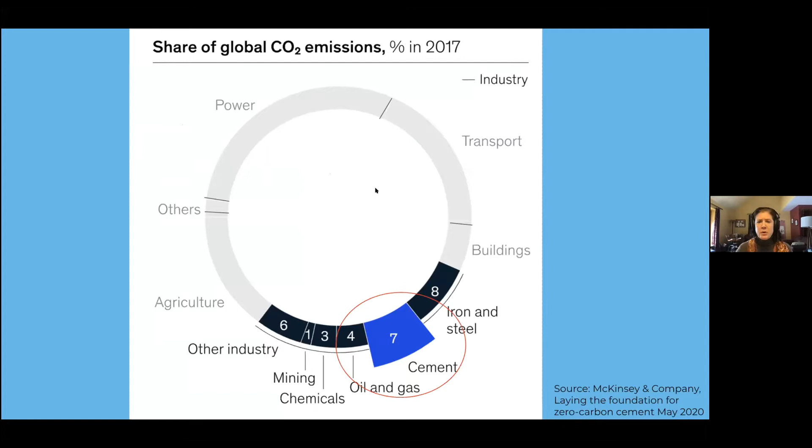So I mentioned both concrete and cement - I want to make sure you understand the difference. Cement is the glue in the concrete. Cement is mixed with water and aggregate, which is made up of sand and gravel. It turns out that most of concrete's emissions are due to the Portland cement, the glue.

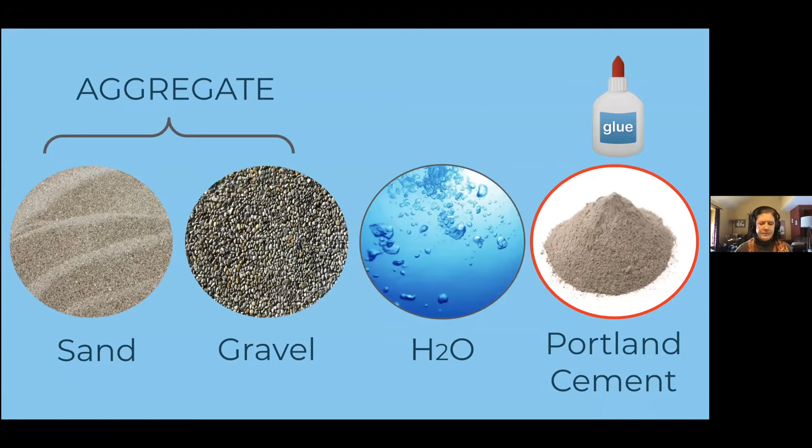Now this chart shows on the bottom line the greenhouse gas emissions from different steps in the cement manufacturing process. You'll notice there's a higher number for the calcination process than for the fossil fuels. That's an important point because most emissions happen from cement in the chemistry of heating the limestone. The heated limestone releases CO2, which becomes clinker. This releases more emissions than are released from the fossil fuels burned to make the heat. So reducing or eliminating the fossil fuels does not solve the cement emissions problem.

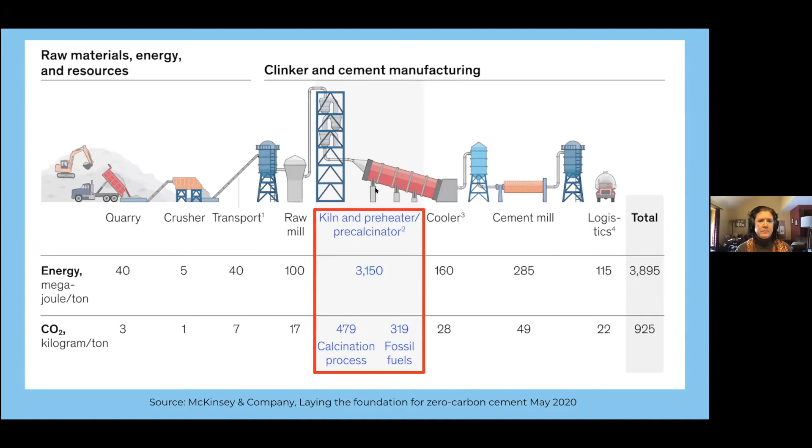The International Energy Agency and others have identified carbon capture and reducing the amount of clinker in cement as the most impactful ways to reduce emissions.

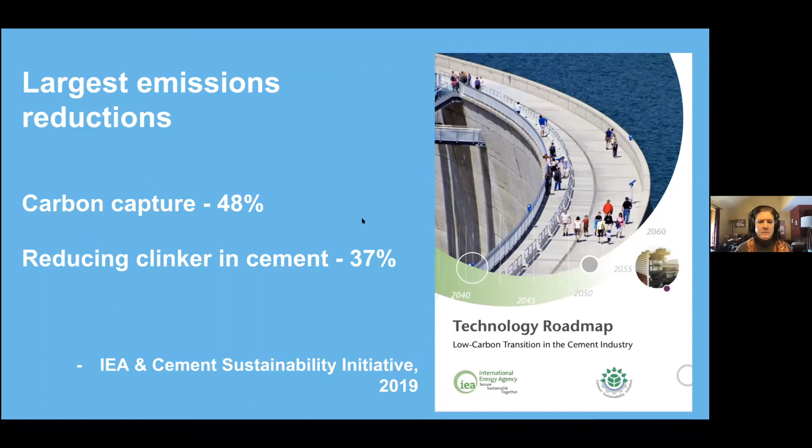So the 2 main approaches we're looking at to achieve low carbon concrete are to use less Portland cement, and to capture CO2 and turn it into a solid in the concrete. It is even possible to put so much CO2 in that the concrete becomes carbon negative.

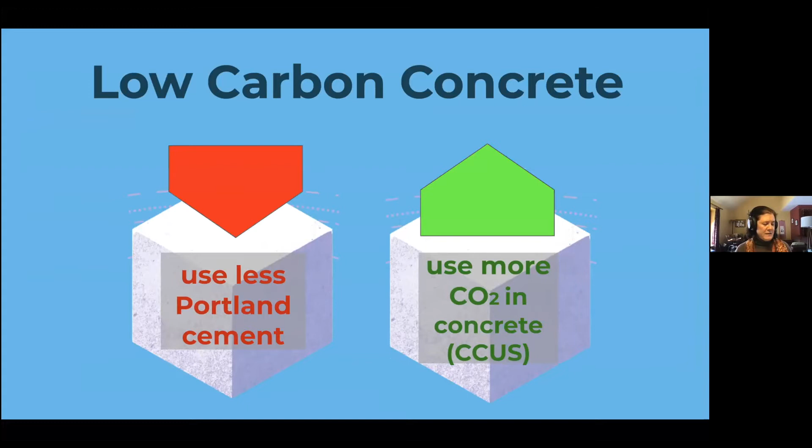A great local example of low carbon concrete comes from Port Authority. They've been requiring that all of their concrete have at least 30% substitute materials replacing the cement. In general, contractors can provide this for no additional cost. A new substitute option they are excited about is ground glass pozzolan, made from glass that would otherwise go into a landfill. Port Authority is also working with academics on a low carbon concrete strategy, and they're going to be requiring environmental product declarations for concrete - let me show you what that is.

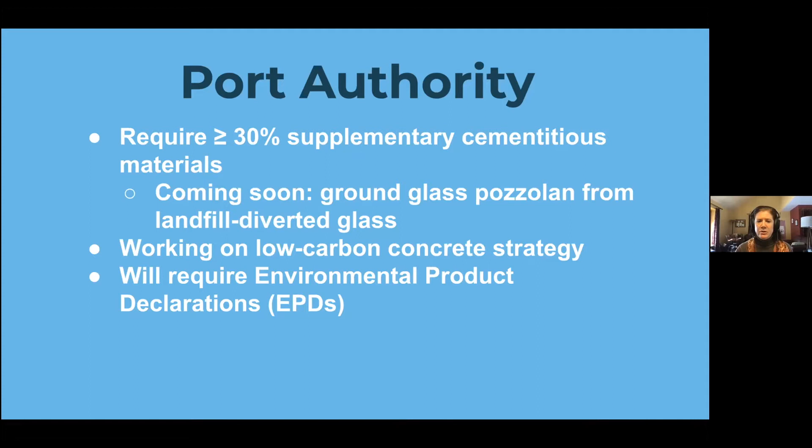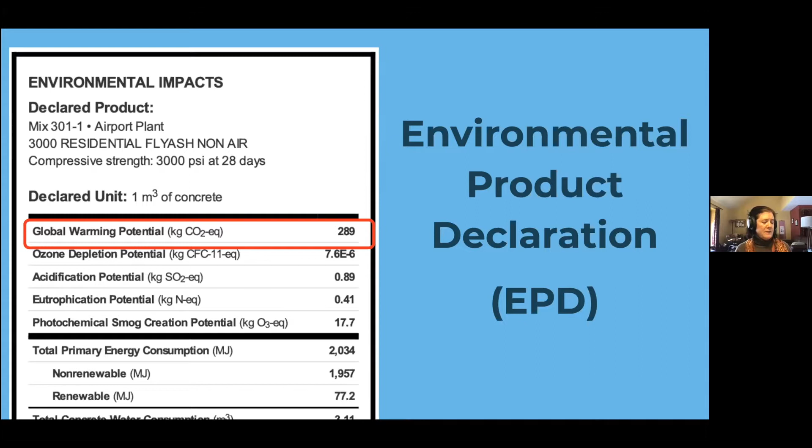Here's an example: an environmental product declaration, or EPD, is like a nutrition label that shows the environmental impacts of a product, including the global warming potential, shown here in the red box, which quantifies greenhouse gas emissions for a cubic meter of concrete. So LECCLA, our bill, requires the use of EPDs - we're going to see this again later.

All right, so let's talk about the bill.

As Ed mentioned, LECCLA focuses on state procurement. The state is a major purchaser of concrete, making it a prime candidate for being an early adopter and driving demand for low carbon concrete.

There are several policy precedents for New Jersey LECCLA. There's California's Buy Clean program, which sets climate-based purchasing requirements for construction materials, though it does not address concrete yet. The United States Conference of Mayors in 2019 passed a resolution urging all cities to consider using CO2 mineralized concrete, meaning the CO2 gets turned into a solid in the concrete.

The city of Portland, Oregon has a low carbon concrete procurement program. And I've already mentioned the New York LECCLA bill, which is still pending. It turns out that the Netherlands has a very similar policy to LECCLA that's been in place for 8 years already, and has been used for the procurement of over $1 billion worth of low carbon concrete.

There are 3 components to New Jersey LECCLA. One is a bidding advantage for low global warming potential, or low emissions. The second is a bidding advantage for doing carbon capture, utilization, and storage. The third is a small tax incentive for concrete plants to create environmental product declarations.

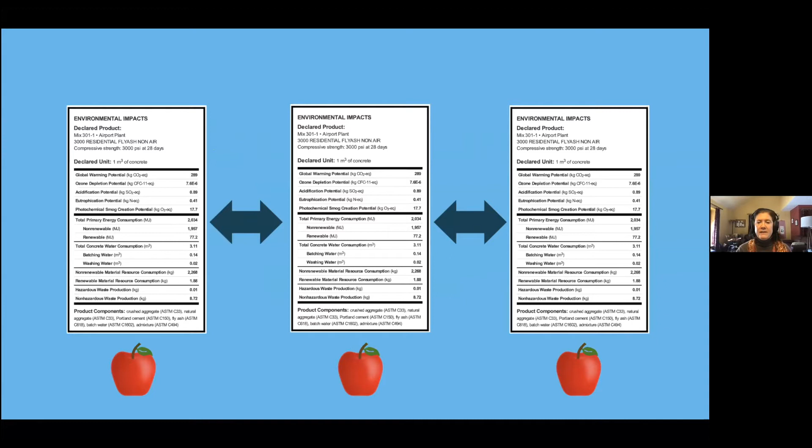So here's where the climate competition comes in. Bids with low GWP scores can receive a discount in the bidding process. Details of the bidding discount process are determined by the DEP commissioner and the state treasurer. Those details are not in the bill, so it allows for flexibility. But let's walk through a hypothetical example.

LECCLA provides a maximum discount of 5% for global warming potential. Say we have a project that gets 4 bids with GWPs. The bid with the lowest GWP, the lowest emissions, could get the maximum 5% discount. So if they bid the job for $100, the bid would be treated like it was for $95.

Bids with higher GWPs, or more emissions, would get a smaller discount. This could be on a sliding scale. There's no requirement to submit an EPD. If a contractor doesn't submit one with their bid, that bid just doesn't get a discount and it's competing on price by itself. There could also be a GWP threshold to ensure that bids with high emissions don't get a discount. So in this example, a threshold of 400 would mean that bid 4 wouldn't get a discount, but it would still be considered.

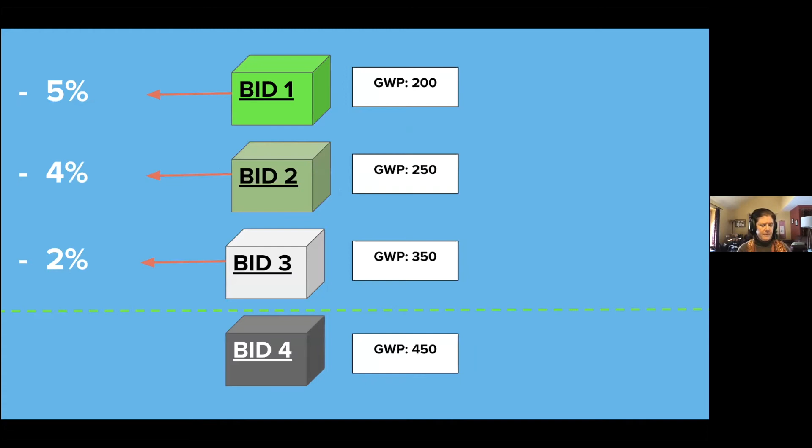Let's go back to our previous example. LECCLA sets a maximum 3% discount for CCUS. So in this case, if bid 1 uses CCUS, its total discount could be increased from 5 to 8%. That is the maximum total discount.

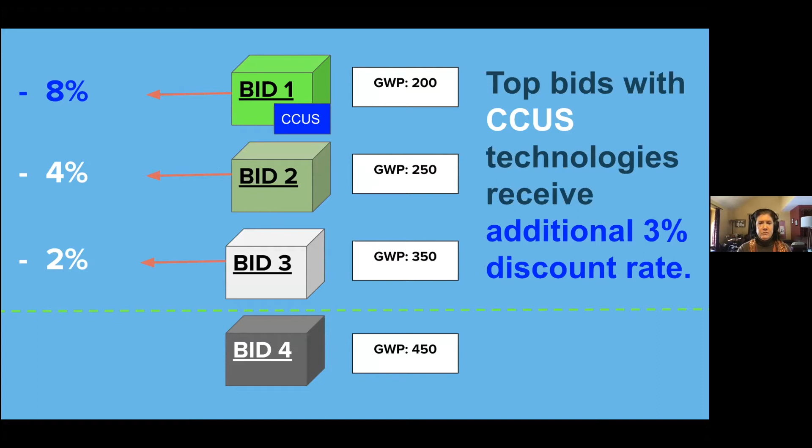So what is the price impact of these discounts? Does this mean that costs will go up by 8%? The beauty of this approach is that bids are still in price competition with each other, and the discount does not change that. The bidders don't know each other's bids or GWP scores, so they're still incentivized to submit a low bid. Climate competition rewards bids that give the most climate benefit for the lowest cost.

And then the final component of the bill is a tax credit to help concrete producers pay for the creation of EPDs for their concrete mixes. The credit is for a maximum of $3,000 per concrete plant. There are only 55 New Jersey plants approved by the Department of Transportation, so if they all got the credit, that would be a cost of $165,000. Concrete producers would only be eligible for the tax credit for 2 years.

So just in summary, LECCLA's approach has a number of advantages. It is technology agnostic—it's not picking a specific method for reducing emissions. It's performance-based. It allows concrete producers to combine multiple solutions in the same concrete mix, so it's to stack solutions. For example, they could substitute for Portland cement and also do CCUS. It rewards innovation by having a flexible discount mechanism that can adjust as new technologies come to market. It has no mandate and does not even require that concrete producers provide EPDs. And it maintains the cost benefits of competitive bidding.

So just to talk about concrete a little bit and orient us to what concrete is: concrete is a lot like a cookie. In a chocolate chip cookie, you've got eggs, flour, and butter—this is kind of your glue or binder system. You've got sugar and chocolate chips, that's filler and flavor. And then you have modifiers to make sure everything is light and fluffy and you get the right balance of everything. Concrete is very similar.

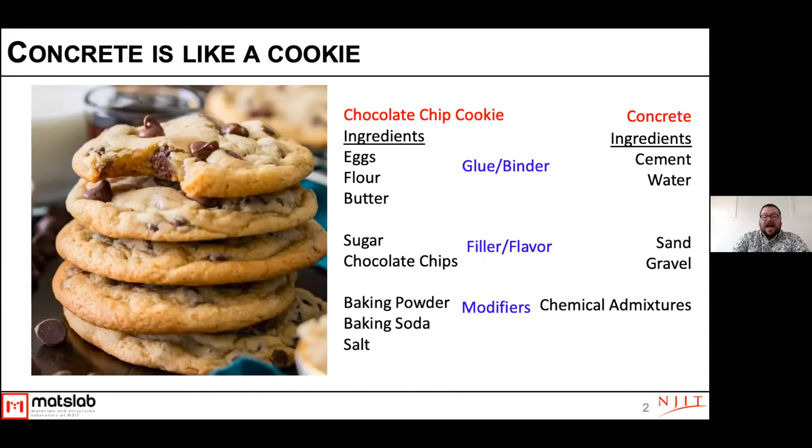We have cement and water, that is our glue and our binder. We have sand and gravel, which is our filler—it's really important for us to have that in there. If we made the whole system out of cement, it would be very expensive and very unsustainable. And then we have a whole bunch of other chemicals we can add in to try to improve that. But like a chocolate chip cookie, you have your basic version that is just cement, sand, gravel, and water. We have all of these variations available to help us change up the mix and give us the properties we want, including helping improve the sustainability and reduce the carbon footprint.

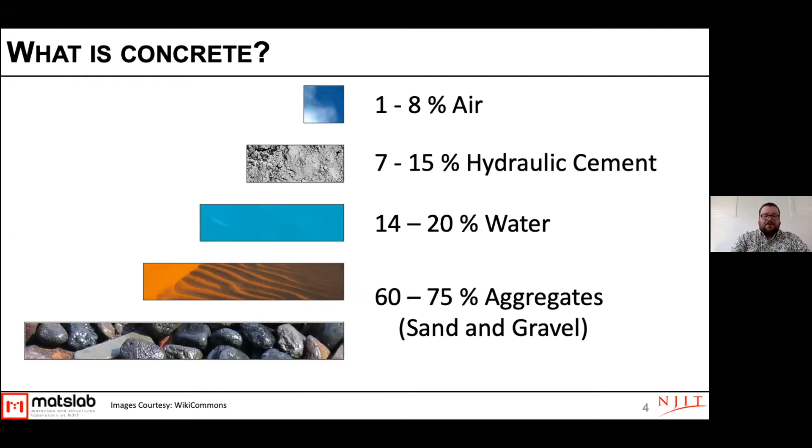So what is concrete? It's about 1 to 8% air, 7 to 15% hydraulic cement, which is your Portland cement in most cases—this is going to be where the majority of your carbon is coming from. You've got water, and then, like I said, most of the material in concrete is aggregates, so sand and gravel. So there's lots of alternatives here that will help get us to this green concrete mixture.

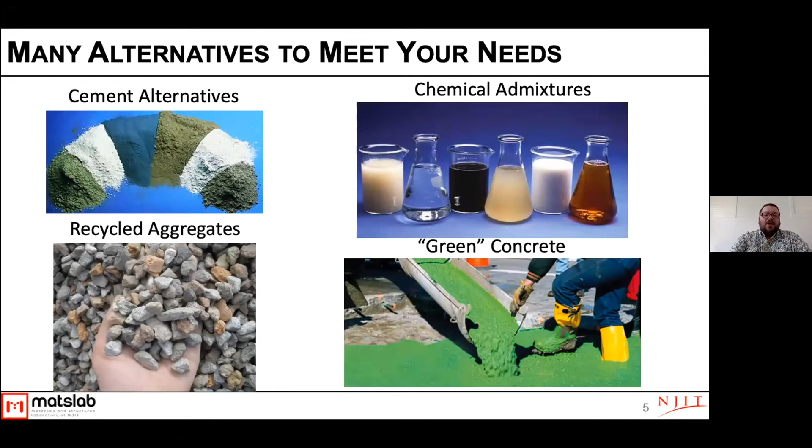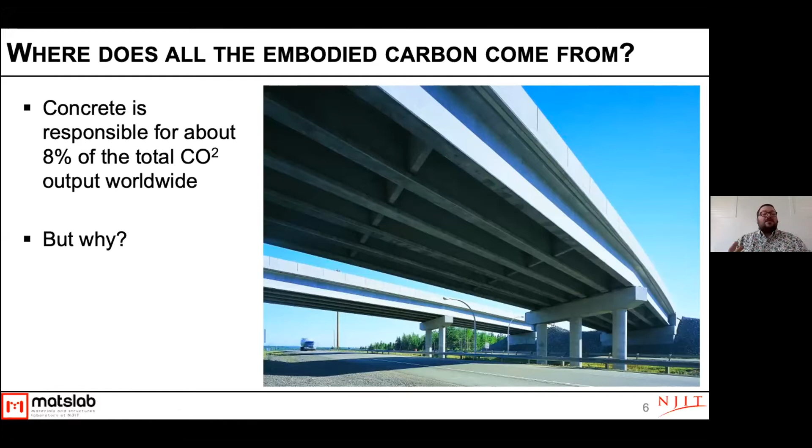But why do we need to do that, right? So concrete—as Sue said, cement is responsible for about 7% of the total CO2 output. If you look at concrete overall, we're adding another percent or two on top of that. And where does this all come from? Well, the biggest issue is that concrete is produced at such a massive scale—we produce almost 2 cubic yards per person per year in the entire world.

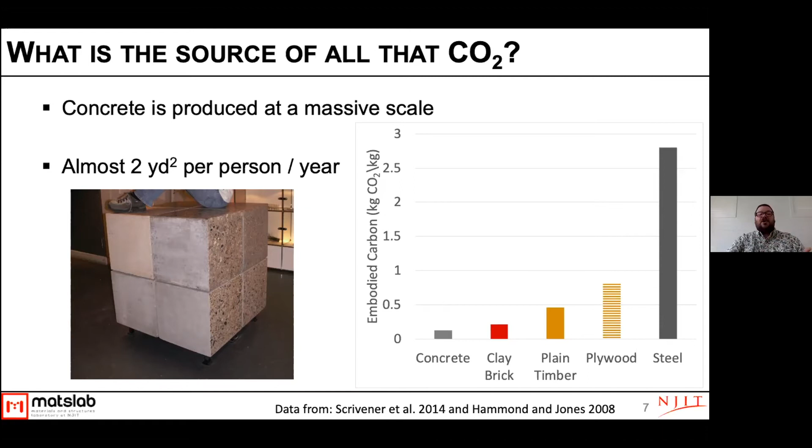And so that is, you can start to imagine how much concrete we're making every year. On a per unit volume basis, concrete is one of the more low carbon emitting materials out there. If you compare concrete to steel on a per unit volume basis, it's much lower. But of course, we make so much more concrete than we do steel that its impact worldwide is much more prevalent.

So that is a problem that we need to address to make sure that we can control that carbon. And where does it all come from? Well, most of it's coming from the cement. You get some CO2 production from quarrying out the raw materials, grinding it down, preparing it, turning it into a powder. That's really only about 10%.

Around 40% comes from what we call the thermal emissions. So this is what is being output from the heating up of the material. We have to heat it up to about 1400 degrees Celsius to get the chemical changes that we need. But over 50% comes from what we call process emissions.

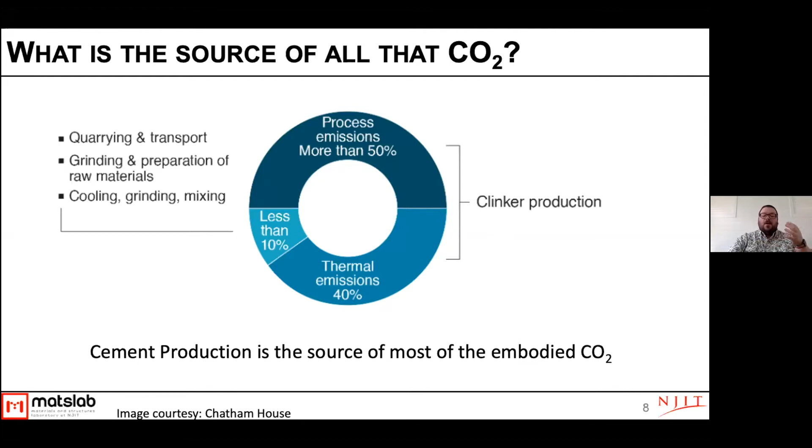And so this is what Sue talked about a moment ago, where we actually have to break down limestone. So when we make cement, it goes into a rotating kiln. This is usually around 300 or 400 feet long. It's quite a large facility. We don't have any cement production here in New Jersey, but there's some in New York and Pennsylvania.

And we put our raw materials in at the top. We have a heat flame coming down at the bottom, and those materials, as they move through the kiln, heat up and change. And so we use all sorts of fuel sources to try to heat that up. We have some that are more CO2 intensive than others. There's been a lot of work to try to shift the balance of that to make it as environmentally friendly as possible. There's been a lot of work in the efficiency of the kiln, making sure that the

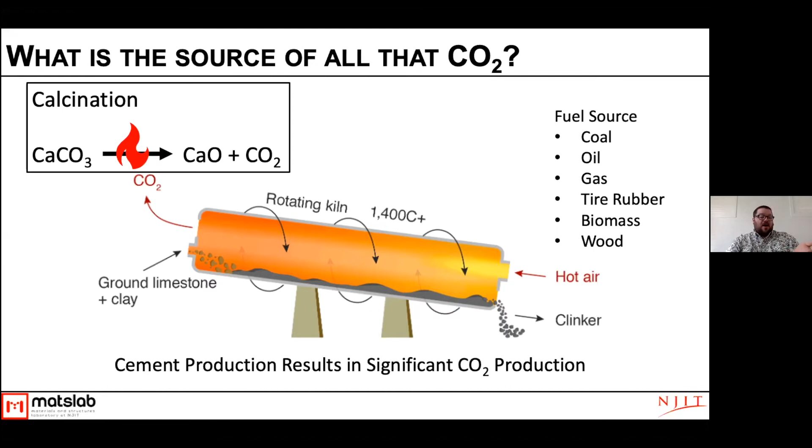heat is contained, that we use any heat that's bled off to do other things. But that only gets us so far, because we have this process called calcination. The limestone that we have to use as a raw material, we need to break down to get calcium oxide. And that is one of the most important components in cement.

And so when we break down that calcium carbonate or the limestone, the CaCO3, we heat it up and we release CO2. And that CO2 mostly gets lost to the atmosphere at the moment. There's a lot of new technology that's being developed to try to capture that as well. That hopefully will be coming on in the coming years. But for right now, that's a lot of CO2 that gets produced from this system.

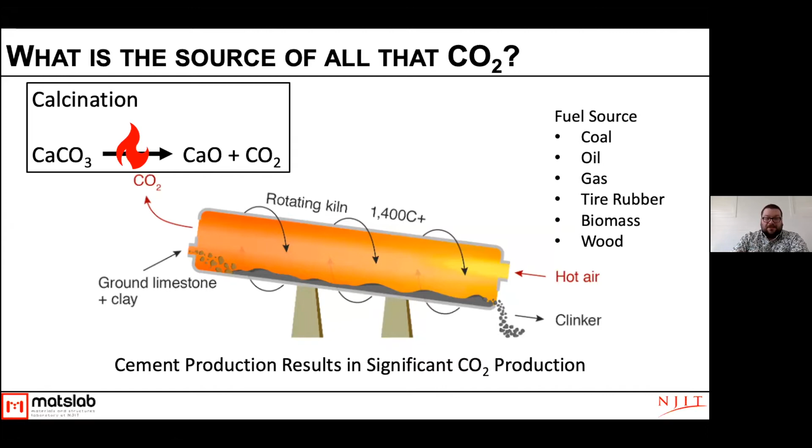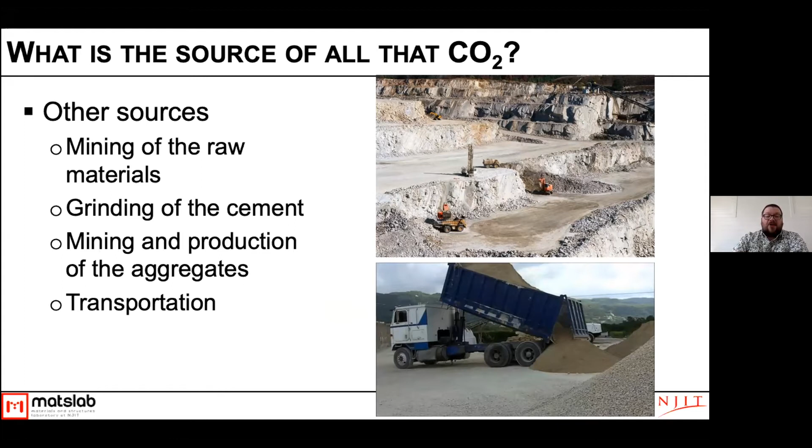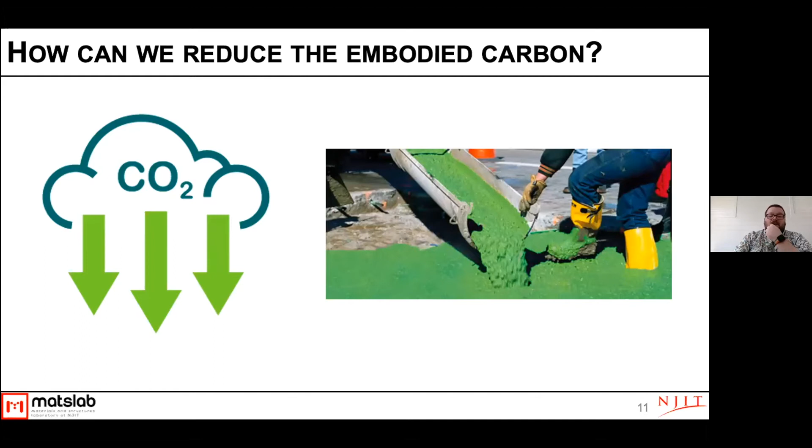Other sources outside of that, of course, is the mining, but really these are mining and transportation, but these are minor compared to what is coming out of the kiln just from the chemical process. So how can we reduce that embodied carbon and make our nice green concrete? We actually have quite a lot of options here. The first one that we typically talk about is reducing the Portland cement.

It's really difficult for us to replace it entirely. We have some alternative cements that work well, but for the most part, other types of cement need to be produced from materials that are not abundant in the earth, right? Portland cement comes from, we use limestone and clay. That's really all you need to make Portland cement. You can get that everywhere.

Other materials, like we can make great cements out of phosphates, but we need all the phosphates that we make to use as fertilizer. And there's no way that the phosphate supply, even if we weren't using it as fertilizer, could supplement what we need for cement. So our first task is to try to reduce this amount.

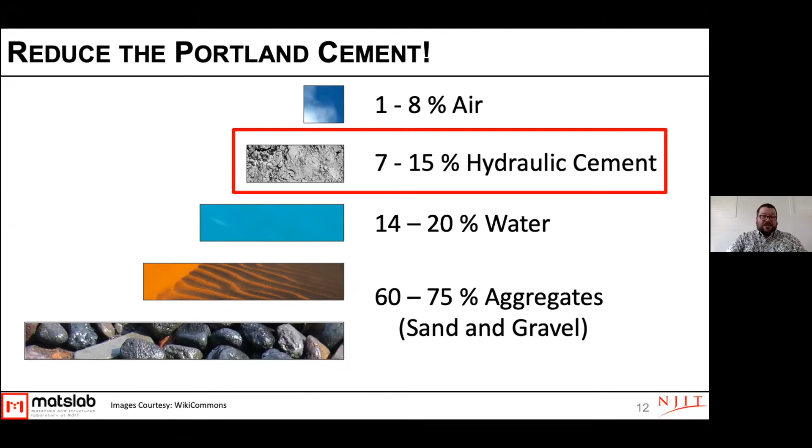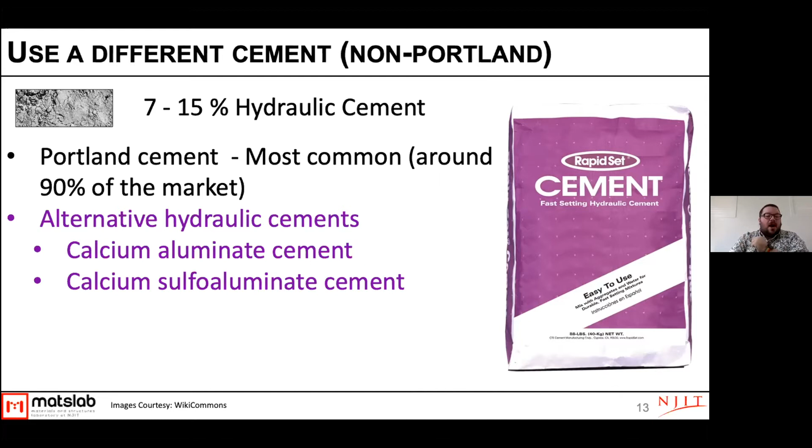So Portland cement is what we mostly use. This is around 90% of the market. We also have some of these alternative cements, like calcium aluminate cement or calcium sulfoaluminate cement. They're similar in composition to Portland cement. And then we have these kind of newer systems, magnesium phosphates, which again are very expensive and we can't produce a lot of, and geopolymers, which are difficult to work with, but coming on more, and those use non-Portland cement materials.

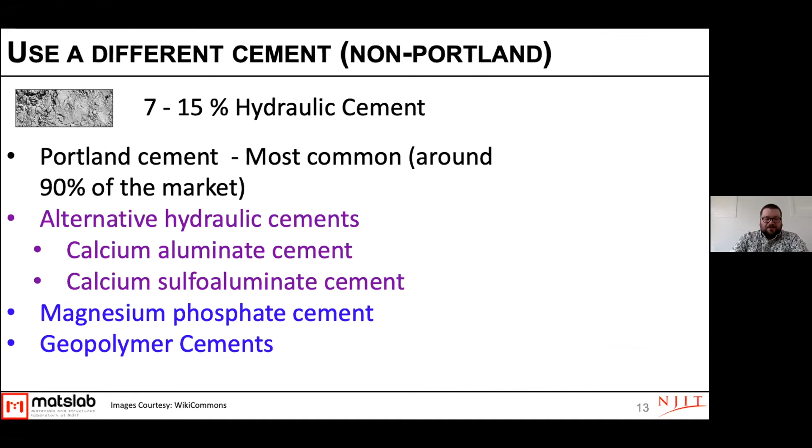So what's kind of the difficulty with these? Well, those first two that are similar to Portland cement are already widely used, but we're talking about 5 to 10 times the cost of Portland cement. And they're really meant for very specific uses because they tend to set and harden very quickly. So they're a little bit more difficult to work with. Whereas, our Portland cement, we get a couple of hours. That gives us the time for the workers to bring it out to the field and place it.

These ones we're talking about hardening in 10, 15 minutes. And so it gets really difficult to work with.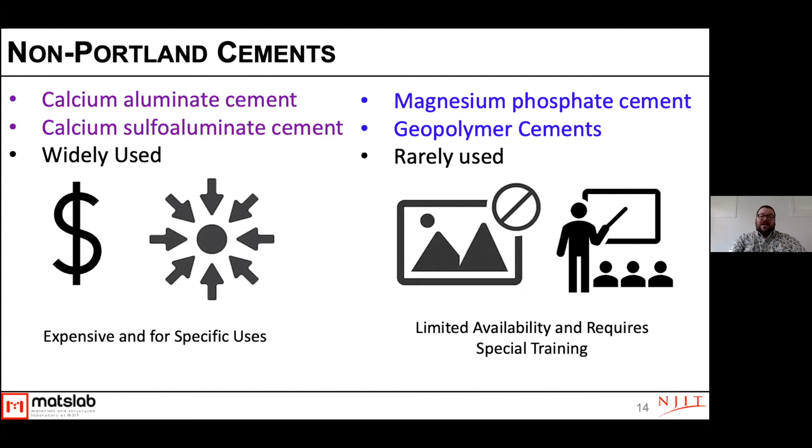These other materials have really limited availability and they don't behave the same way as our typical hydraulic cements. So what else can we do? We can use what are called supplementary cementitious materials.

These are things like ground up limestone mixed in with the cement. We use waste byproducts from other industries like fly ash and silica fume. And then we have newer products coming on like ground glass pozzolan, which is crushed up waste glass, and calcined clay, which is clay that has been heated up. Locally, we have a new plant for ground glass pozzolan that came online in Connecticut that is really going to help us access that great new SCM.

So we replace a portion of the cement with these. We can't replace all of the cement because we need some of the chemical products that come from the mixture of water and cement to make these work. If we were just to replace the cement with, say, fly ash, it would never harden. We wouldn't get a solid product, and we wouldn't get any of the properties that we need.

These have a moderate cost depending on the SCM. They're mostly about the same price as cement, so you're not really seeing a huge cost increase. And the benefit is that a lot of them are actually already heavily used in the industry. It's just not standard yet—we haven't made it the baseline.

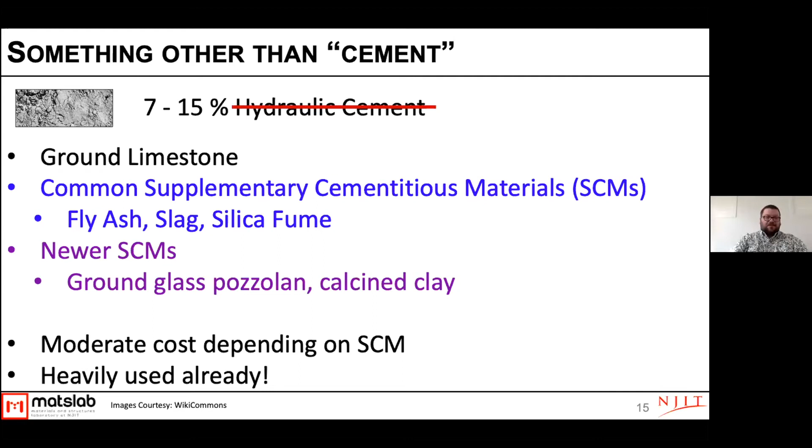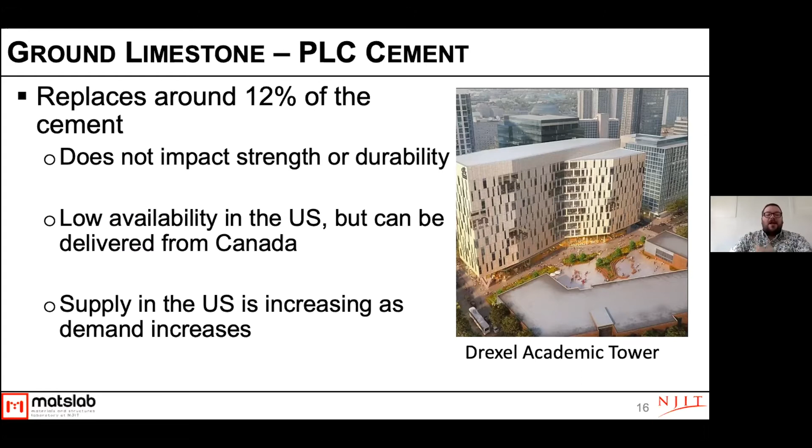Ground limestone is another one I want to focus on. Here we're replacing usually around 12%, with no impact on strength or durability. This is something where you can try to make an impact. Right now we have low availability of this in the US because it's just not requested as much, but we can get it delivered from Canada. Even with that transportation cost, it's typically a better product or better carbon performance. But this is something that's really starting to come online a lot here in the US.

Another thing we can do is reduce our cement through mixture design. A typical mixture will have 500 or 600 pounds of cement per cubic yard. But we can actually reduce that by ensuring our aggregates are well chosen for their size, so we have less space in between them. We actually need less cement, and we don't see any strength loss in this.

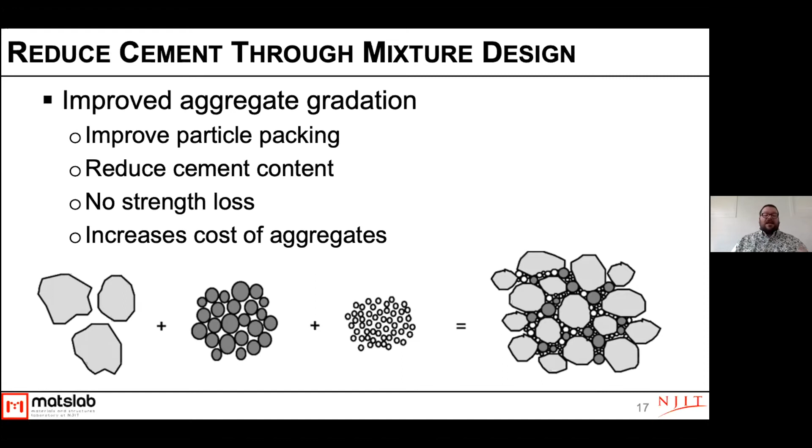Right now this is difficult because it increases the cost of the aggregates, since it requires our aggregate producers to make a different material. But again, as with all of these products, as it becomes requested more, those costs will go down.

The next one we can talk about is incorporating CO2 directly into the mixture. This is something like what CarbonCure is doing, or Solidia. Solidia is here in New Jersey, a technology company. With CarbonCure, you're looking at about 1% by mass of the cement that you're mixing in with CO2. So it's not actually a lot of CO2, but the key is that mixing it in increases the strength and performance of the system so you can reduce the cement content.

Solidia Technologies' product is a little bit different. They have a material that they actually cure—they force CO2 into the system while it's curing, so you get quite a bit more CO2 in that system. These are new technologies that are starting to become more and more available. CarbonCure specifically is starting to work with plants here in New Jersey, and Solidia Technologies is already selling some of their products around. These are things that are definitely here already.

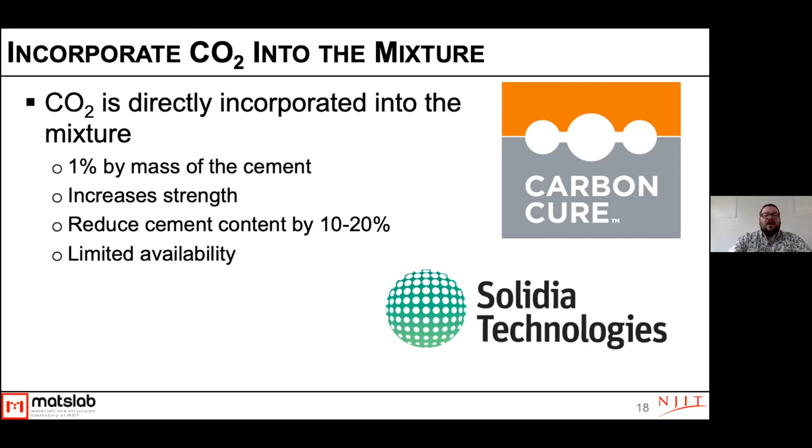We can also change our aggregates using recycled waste aggregates. We can easily replace up to 20 to 50% of our aggregates. The main benefit for CO2 here is that we reduce transportation costs by not landfilling our waste and bringing in aggregates from new places. It's not a huge CO2 improvement, but it's generally a good sustainability practice because we're reducing landfilling and reusing waste.

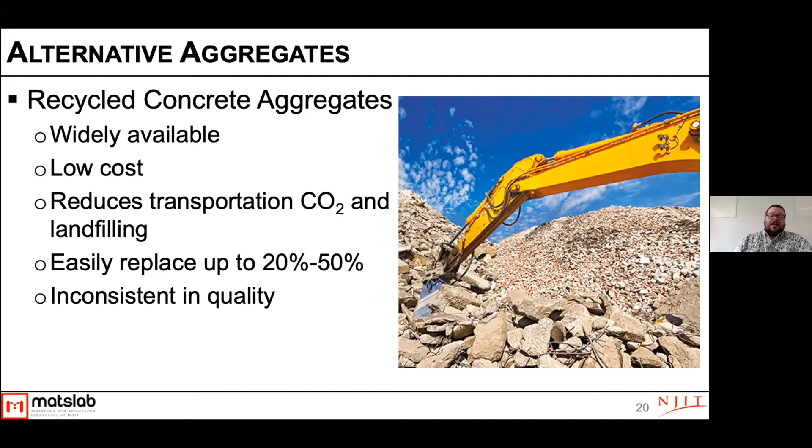We also have some other alternative aggregates like crushed up glass, and new types of aggregates coming on the market. In some places—we don't have them here yet—they're actually taking CO2 and mineralizing it into calcium carbonate, basically making limestone and depositing it around an aggregate. Then you can use that as the rocks in concrete.

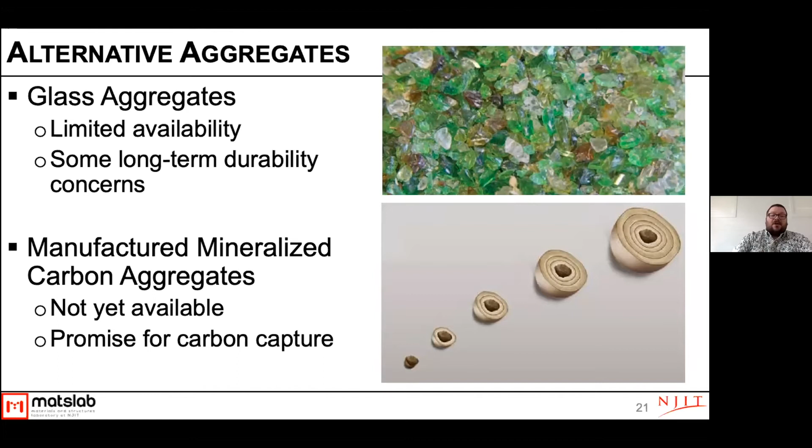Your best option, the thing we always want to do first, is make sure that when you're working with contractors, you design for durability. If you design a sidewalk that lasts for 100 years, you get half the CO2 output of a sidewalk that lasts for 50 years. So always planning our infrastructure for the long term, and designing it to last, is a key element.

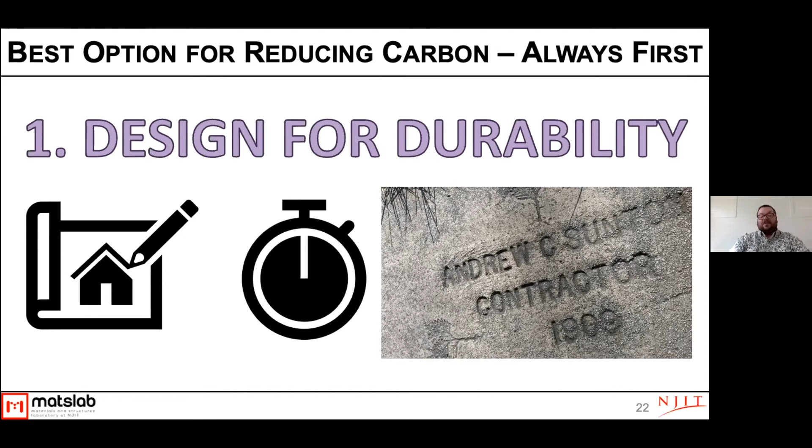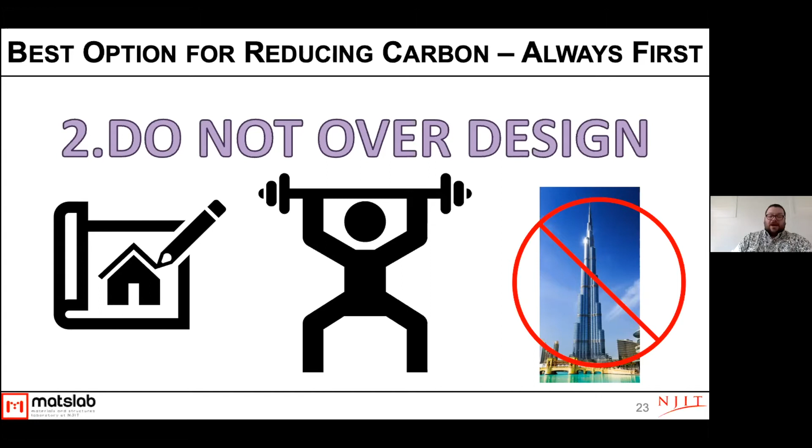So in summary, there are many ways for us to reduce the embodied carbon in concrete. The key I want to stress here is that some of these are already being used extensively. So what this bill is asking people to do is not necessarily bring in new technologies - it allows new technologies to come in and helps promote them, but we already have technologies that have been used quite a bit. This is just trying to make sure those are actually being employed.

These changes, if you have a plant that isn't employing these, can be done quickly and easily, but it really requires communication between the engineers, the contractors, and the towns and state that are procuring these. Really having the state request these is the key element, because that's going to make sure the products are actually being supplied. So with that, I thank you, and I'm happy to answer any technical questions that come up.